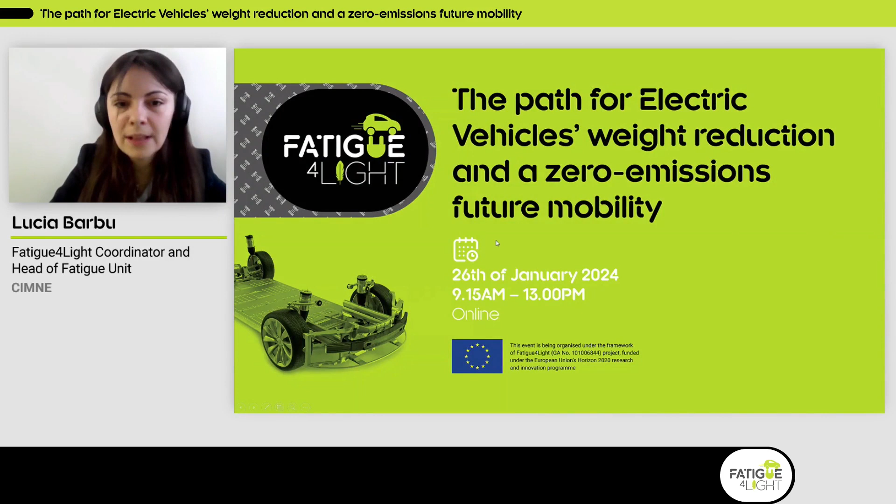Now we will be starting the event this morning with a welcome presentation and some general information about how the event will proceed today. After that, we will have a keynote session, and I will be giving you an overview of the general results we've obtained in the Fatigue4Light project.

After that, a very short coffee break, and we will continue with the technical session, in which several partners from our consortium will disseminate some very interesting developments we have achieved during these past 3 years of work. This session will continue until another small break, and we will end the event today with a round table, where we have industry experts in our consortium who will be openly discussing future perspectives for lightweight and advanced high-strength steel materials and components applied to the automotive sector.

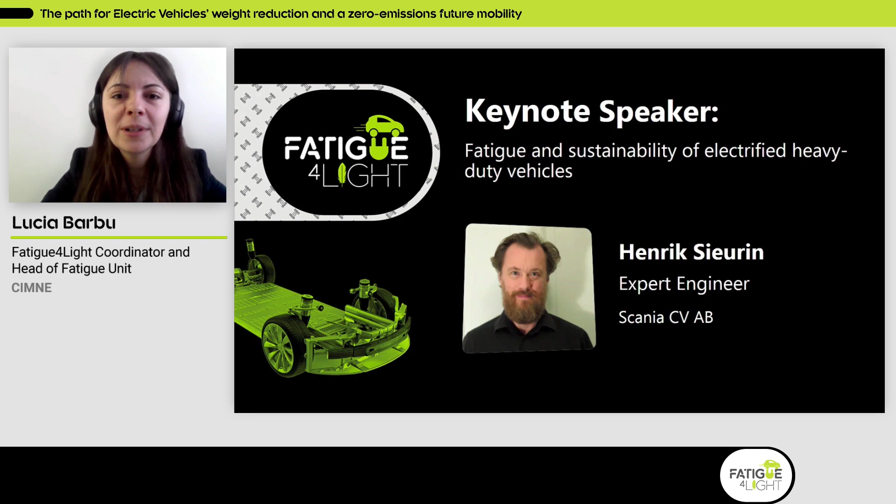Danny? Good morning, everyone. Lucia, thanks for the introduction and for the first words about the project. I just would like to say that during these 3 years in the Fatigue4Light, we have been developing lightweight solutions adapted to the specific needs of the chassis parts. These solutions are based on the development and introduction of advanced materials with high fatigue performance, and the development also of experimental and modeling tools to facilitate and promote the implementation of these solutions in electrical vehicles. Lucia will give you an overview of all these results at 10.

In the last years, there were a lot of projects dealing with lightweight in vehicles, which is what we need to reduce CO2 emissions. But I would like to remember that this Fatigue4Light project is one of the first European consortiums that holistically address the reduction of weight in the chassis parts, especially thinking in the needs that electrical vehicles will have. We understand that this is the way to reduce CO2 emissions, and also to extend the range of electrical vehicles and boost their introduction in the European roads.

If we think about the CO2 emissions effects, in the coming years, the vehicles that will have a higher increase in CO2 emissions are the heavy-duty vehicles. And also heavy-duty vehicles needs to consider fatigue resistance when designing most of the chassis parts.

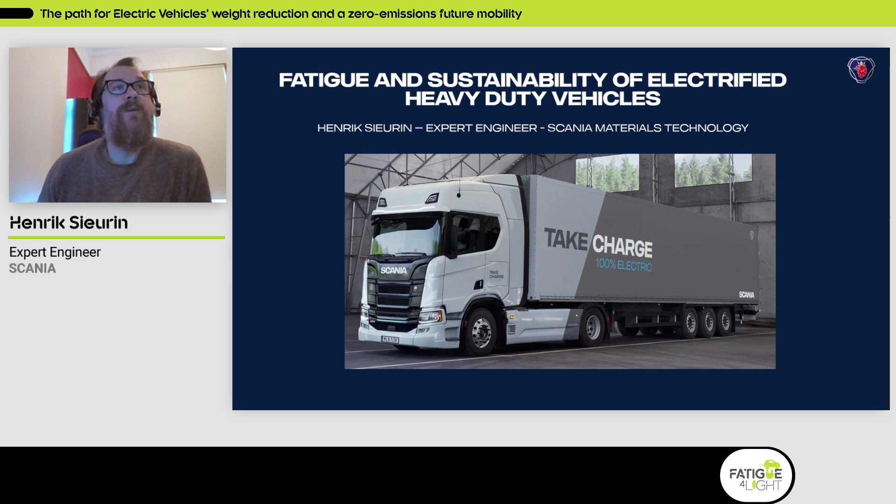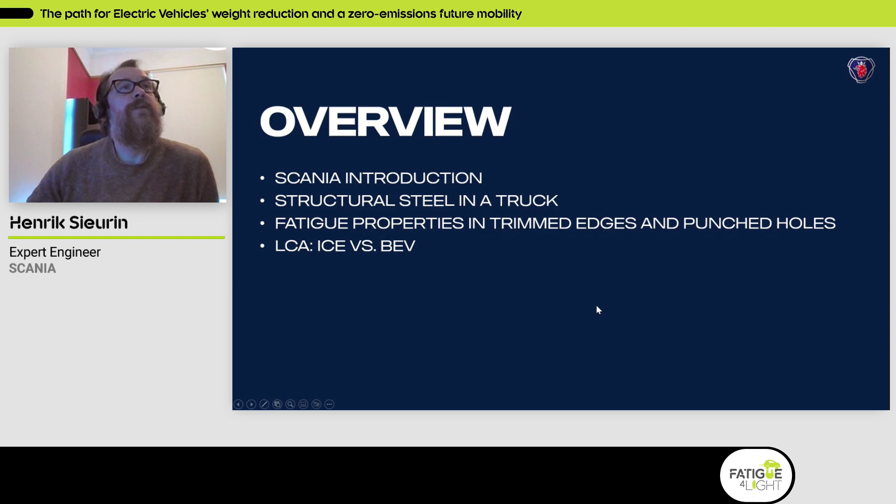So this is an overview of my 30 minutes. I will say just a few words about Scania and then what kind of materials that are used in the truck. And then I will focus on, obviously, on fatigue properties, especially for trimmed edges and punched holes that we have been focusing a lot on recent years. And in the end, I will also say a few words about a life cycle assessment study that we have been doing, comparing a combustion engine and a battery electric truck.

So Scania, we produce trucks, everything from long haulage, construction, and distribution. We also, due to our modular system, are well prepared for building more special purpose vehicles like fire trucks, for an example. We also produce buses and engines for marine applications or gensets, and of course, network and services related to our hardware and also used vehicles.

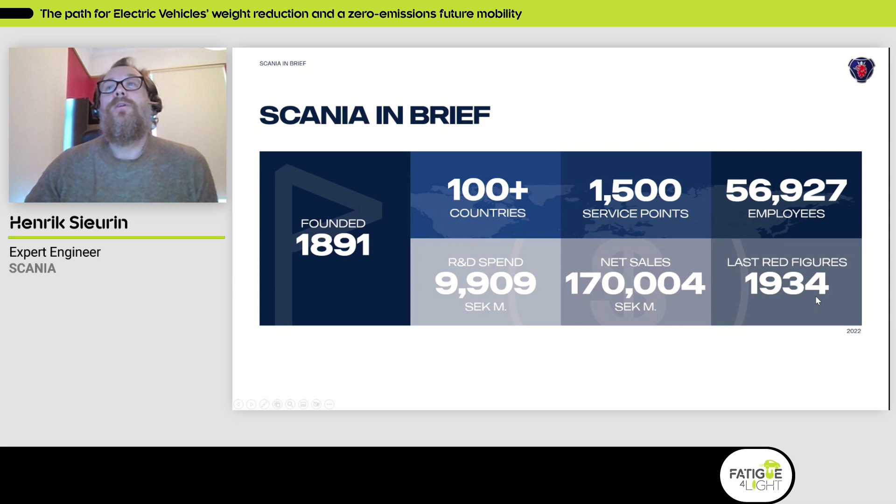So Scania is a relatively old company, founded in 1891. We are about 57,000 employees in over 100 countries. Last year, we spent about 1 billion euro on R&D. And we are also very proud that we have been doing profit since 1934, which is some kind of record, I think.

Scania belongs to the Volkswagen network, and you see the 13 different brands within the Volkswagen group. And this is, of course, very nice to have this internal network when you work with R&D to share experience and knowledge.

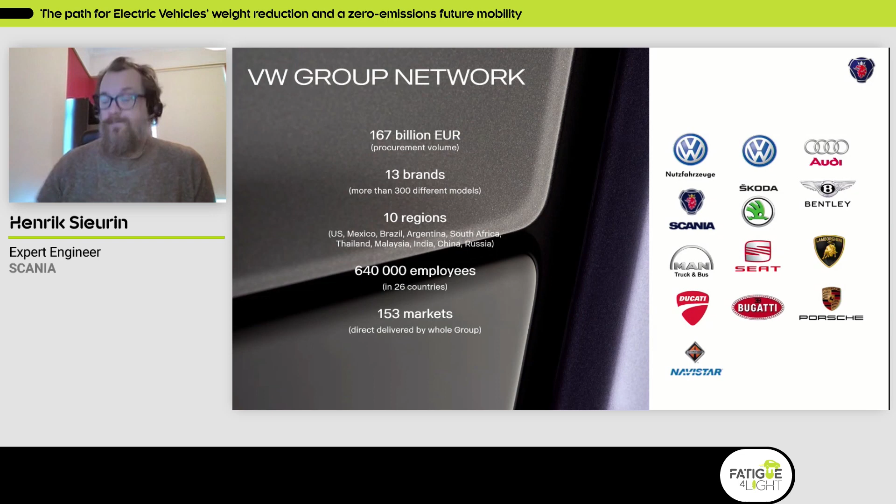But in the heavy duty vehicles section of the Volkswagen group, a company called Traton is created, where you find the heavy duty vehicles. So we have Scania and MAN, we have Navistar in US, and we have Volkswagen Omnibus in South America. And we are working very heavily on finding synergies to have a common platform both for chassis and cab, just as you see for passenger cars in the Volkswagen group, for an example. To start with, we are now focusing on finding common platforms for Scania and MAN, which might be the most similar vehicles, and then we will continue to also work more focused on common cab and chassis for the other two brands.

So the modular system is really one of the key factors for our success. We have a limited amount of part numbers with a few fixed interfaces, and by this you can combine and tailor suit the truck for every customer. Generally speaking, every customer's truck are tailor suited for their business, so to say.

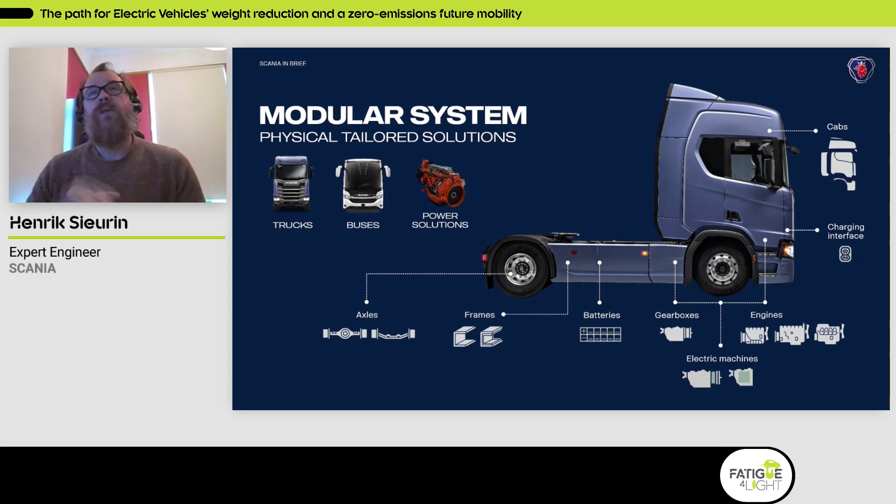Scania was the first heavy-duty vehicle manufacturer that in 2020 committed to science-based targets, and this is something we are really committed to fulfill. In 2025, already next year, we will reduce our CO2 footprint from our own production and operations by 50%, and I believe that is already fulfilled. Then we have the more challenging part, scope 3, the CO2 footprint from our products in service, which is 90% of our total CO2 footprint.

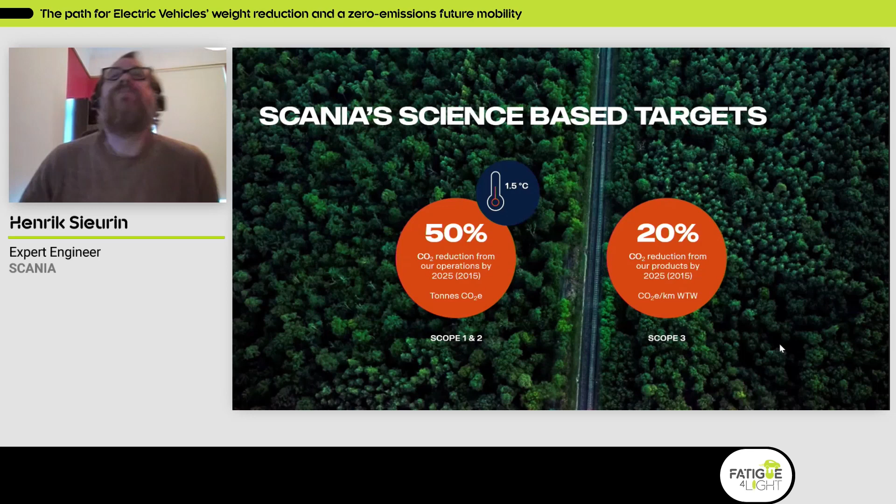So enough of Scania background. I will now focus more on steel and fatigue, my favorite subjects, especially structural steel or steel sheet metal.

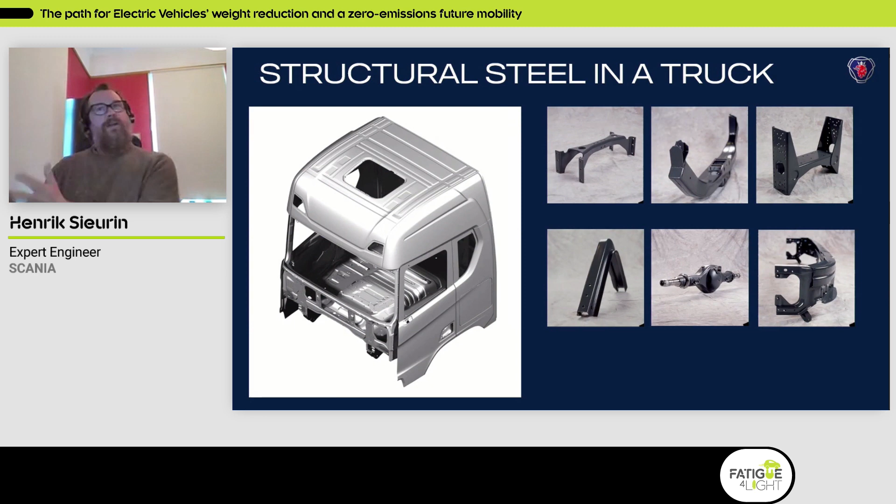First we have the cab, which from a material point of view is similar to a passenger car, with similar requirements and similar material grades. Then we have the thicker sheet materials for the chassis components.

For the chassis, we typically have between 3 and 10 millimeter thick steel, thermomechanically rolled in general, but also press hardened steel for crash resistance, like front underrun protection and bumpers. You might also see more press hardened steels for battery electric vehicles. This is a traditional combustion engine chassis, and the requirements are, well, I would say fatigue is the most important property that a chassis is dimensioned for, but of course you also have stiffness and corrosion issues.

The cab, on the other hand, is another world. Here we have cold rolled steel and similar grades as found in passenger cars: DP steels, CP steels, microalloyed steels, and also press hardening steels, galvanized of course. Here the requirements are more about crash, stiffness as well, surface finish, and of course you also have fatigue requirements for the cab.

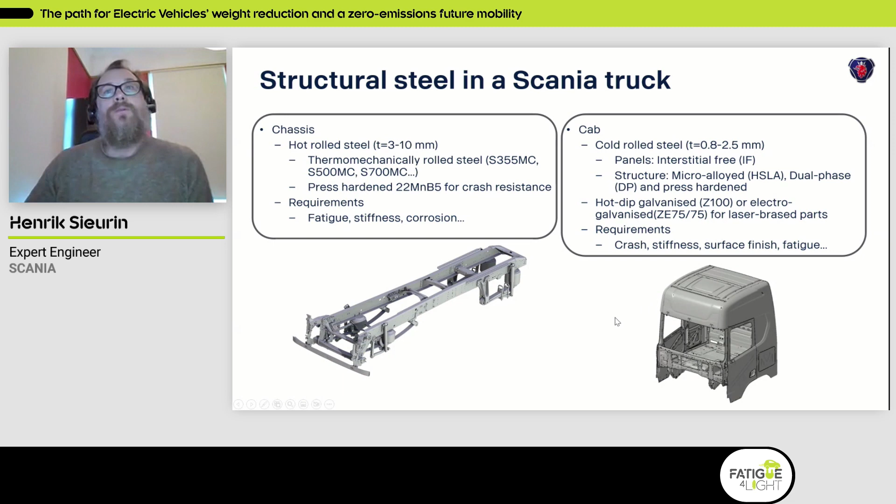So when we now electrify our trucks, we face new challenges due mainly to the size and weight of the batteries. We have to load many tons of batteries in order to get a good range, and the batteries are big, so we have a limited amount of space. We need high strength, very formable steels in order to optimize the design. And as mentioned, these batteries are also heavy, so in order to still have some load carrying capacity, we need to reduce the weight.

Lightweighting is very important, I would say even more important now. The batteries are also expensive, so we have to find cost sustainable materials too. Steel is still relatively cheap compared to other lightweight materials. And the batteries are sensitive, so we need good crash protection, which also asks for advanced high strength steels to do this job.

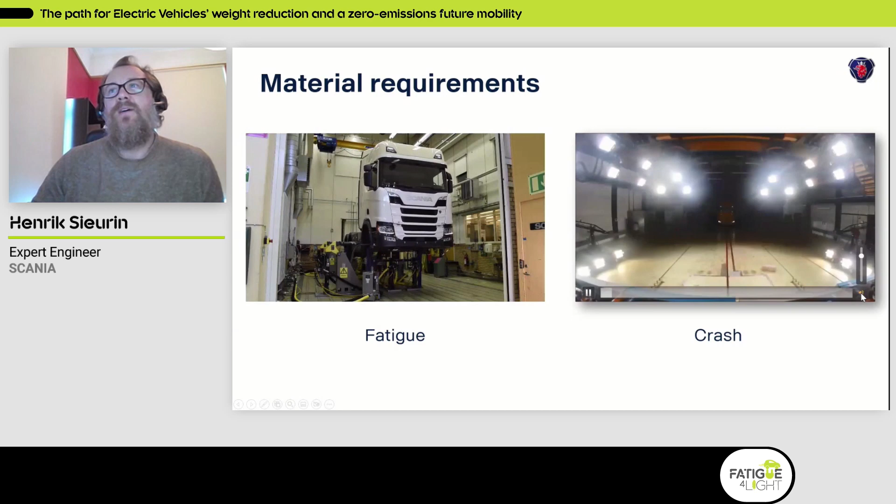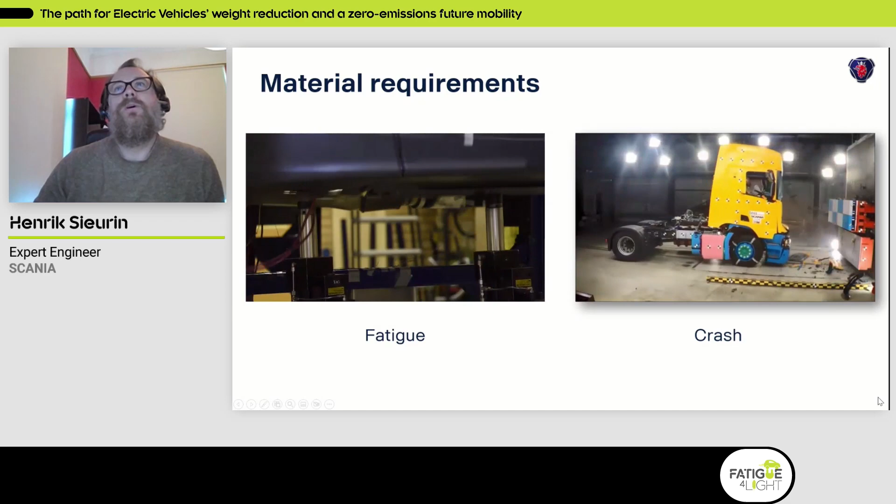So the outlook is that there will be an increased demand for fatigue and high strength steels with state-of-the-art forming technologies for the electrification journey. Again, the requirements are fatigue and crash. I will focus on fatigue in the coming slides, but crash is also important, obviously, not only to protect the truck driver, but also to protect the driver in a passenger car in case of a crash.

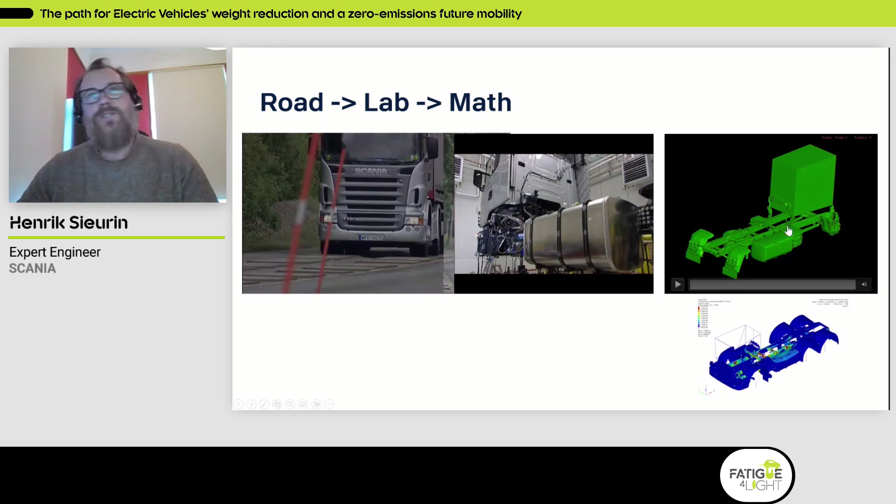The way we design for fatigue is, first, we drive a truck on our test track with different obstacles, simulating real road conditions. Then we take these signals and move them into a shake rig where we can accelerate the fatigue testing in a more controlled atmosphere. Of course, we also have a digital model for design and calculation engineers to find the hotspots and determine where we need to reinforce the structure or redesign in order to have good enough strength.

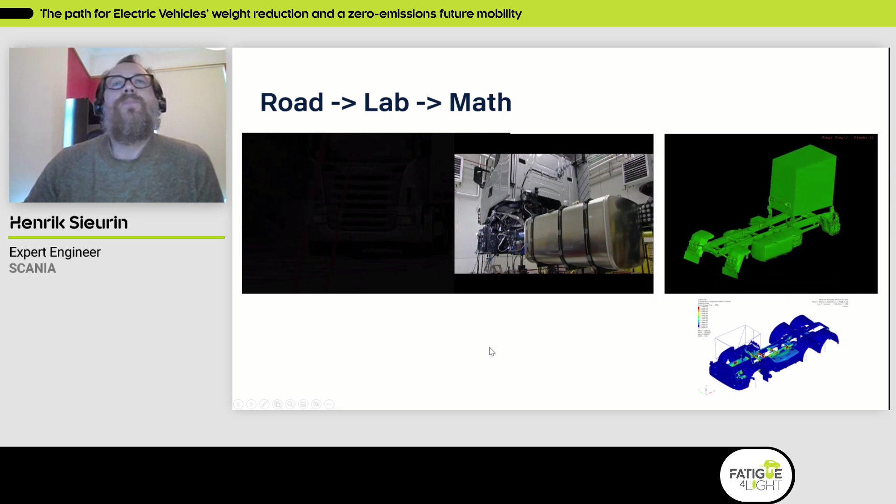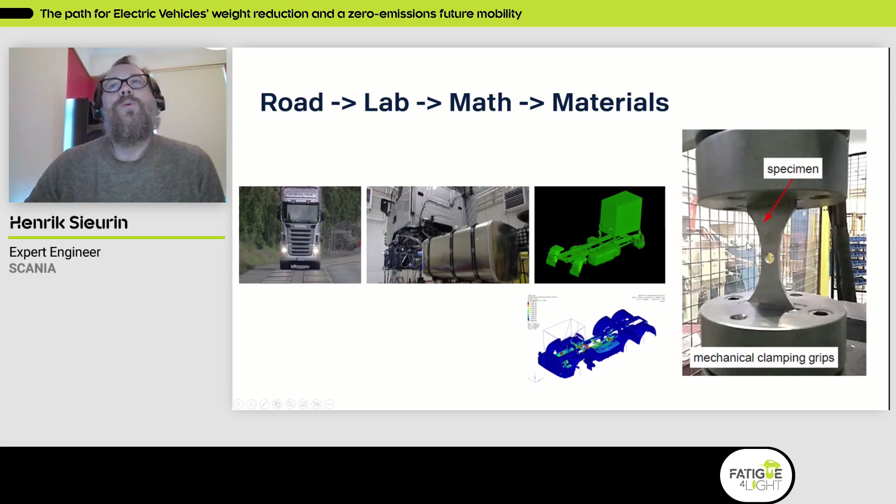When I put together these slides yesterday, a previous slide I've shown many times before, I realized something was missing: the material part. When the design engineer or calculation engineer comes to us in the materials department, they ask for material data, quite often rather specific material data. It's not enough to do fatigue testing on a polished sample; they need to know what fatigue properties we have in a bend with residual stresses, or in a punched edge, or a trimmed edge. So this is obviously also one piece of the puzzle, I would say.

I will move on to focus more on fatigue. As you're aware, we don't have a linear relationship between yield strength and fatigue strength. It depends on the surface roughness. If you have a relatively smooth machined specimen, for example, there's almost a linear relationship - increased yield strength gives increased fatigue strength.

But then it makes no sense increasing material strength anymore. So this is how we have thought in the past, maybe. But of course, if you still want to increase the fatigue strength, what do you do then?

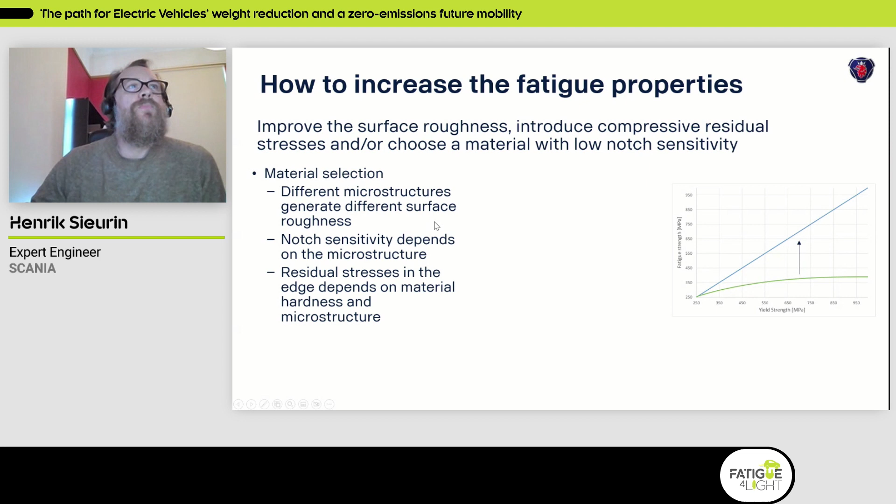Working with the material - different microstructures generate different surface roughness if you machine it or punch it, for example. A ferritic-pearlitic material generally gives a rather rough surface with bad surface roughness. On the other hand, if you have a pure martensitic steel, you get more like a cleavage fracture with a better surface roughness. And the notch sensitivity also depends on the microstructure.

I have learned that crack propagation is independent of the material strength, more or less, but that's not totally true for these more advanced high-strength steels with complex microstructures. The microstructure does matter, and I will talk more about that later. Of course, you can also introduce residual stresses, which depends on the strength of the material but could also depend on the microstructure.

Another way to do this is to work with the manufacturing methods. Laser cutting, for example, gives a much cleaner surface with better roughness, and you might even introduce compressive residual stresses at the same time. So this is another way to avoid fatigue issues.

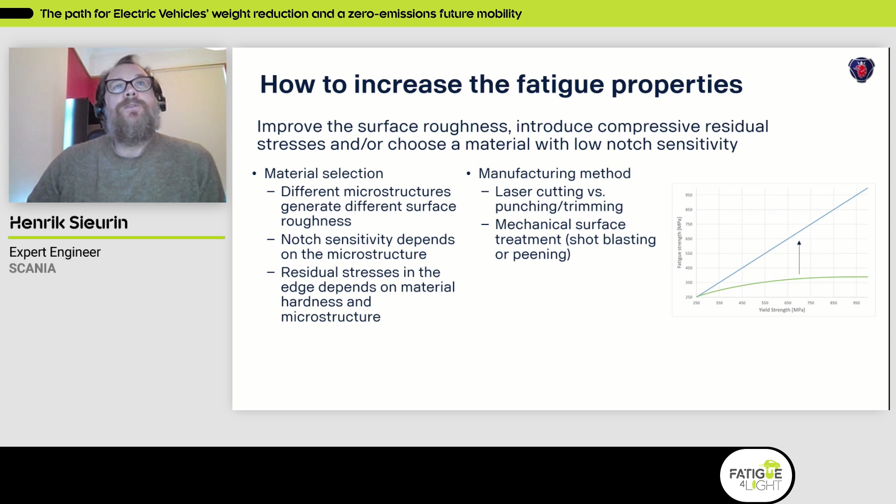And you can also introduce mechanical surface treatment like shot blasting or peening. This has a combined effect - first, you introduce compressive residual stresses, but you can also improve the surface roughness and the round corners and so on. So I have a few examples.

Example one, two-step punching. In the side member, you have a huge amount of holes, and from these holes fatigue cracks can initiate, especially if you have an empty hole close to a bracket, like you see in the picture. So when you punch a hole, you get...

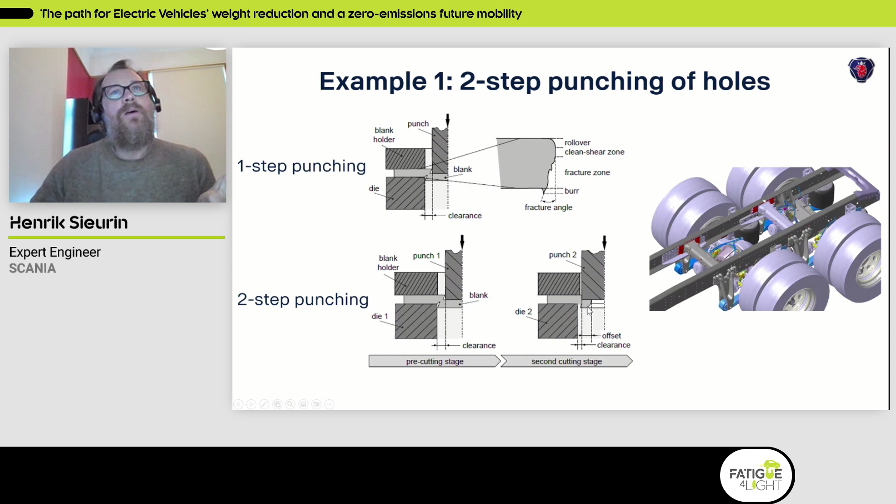a shearing zone, a fracture zone with relatively bad surface roughness, and here fatigue cracks can initiate. But if you do the two-step punching, you first punch a smaller hole with a smaller diameter, and then you come after with a slightly wider punch to shave off a piece around the edge.

By doing this, you get a much nicer surface. To the left, you see a typical one-stage punched hole with the shearing zone and fracture zone - you see quite high hardness in combination with poor roughness, which is not good for fatigue. In the two-stage cutting or punching, on the other hand, you can compare this blank zone, this shearing zone - it's much longer, you have no residual stresses, and you just have a small fracture zone.

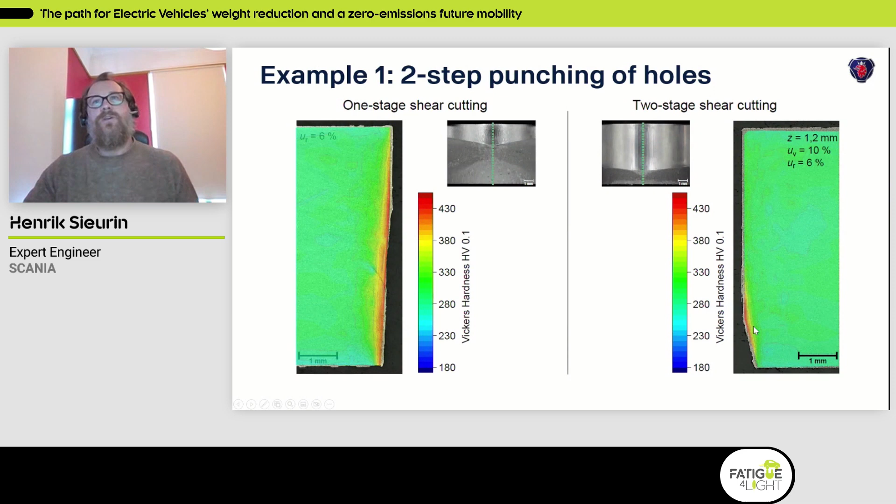So this is a good way to increase the fatigue strength in punched holes.

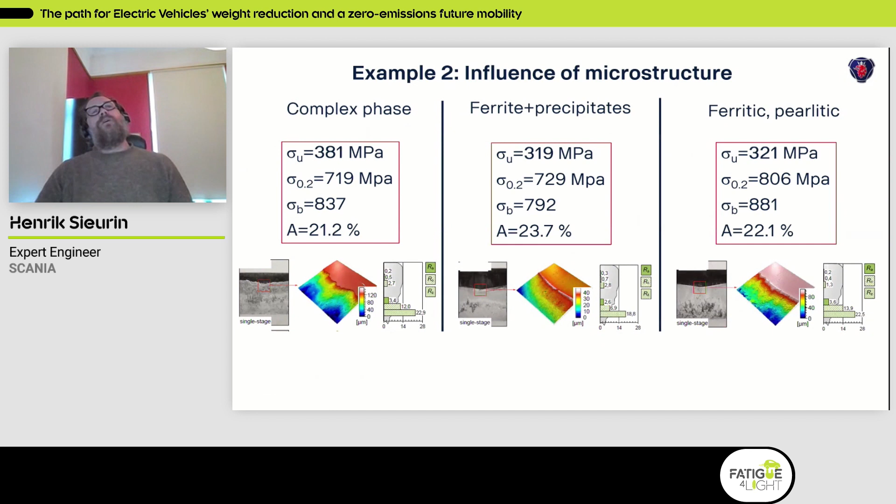I move on to an example of how the microstructure also can influence the fatigue properties in a punched hole. In this study, we compared 3 different materials: a complex phase steel, a ferritic material with precipitates, and a ferritic pearlitic material.

The yield strength was rather similar for these 3 grades, with the complex phase having the lowest yield strength. The ductility and elongation were also rather similar, with the complex phase actually having the lowest ductility. The surface roughness was also rather similar, with the complex phase having the poorest roughness in this fracture zone.

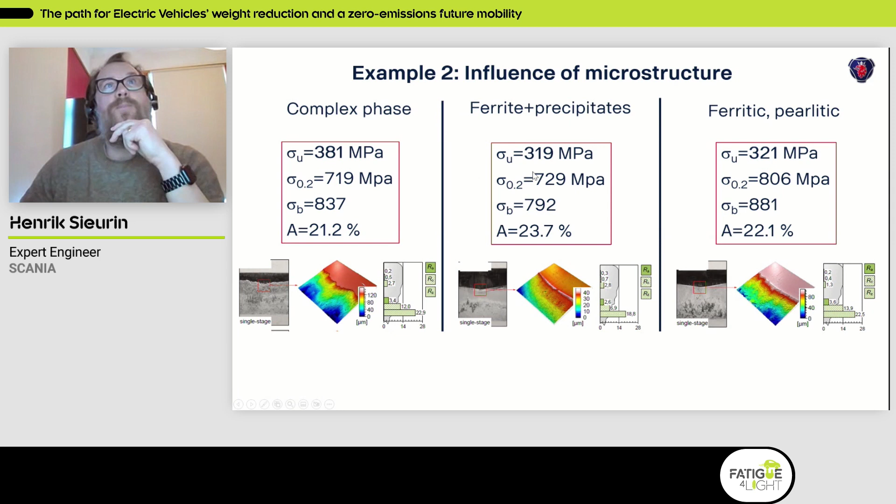Despite having the lowest yield strength, lowest ductility, and the poorest surface, it had the highest fatigue strength, 380 compared to 320. That's almost 20% better fatigue properties, despite these other factors that you would assume would give a lower fatigue strength.

So one reason for this, to try to understand why, we did fracture toughness testing performed at EURECAT with this essential work of fracture method. As you can see, this complex phase steel had almost doubled fracture toughness compared to the other materials.

So that indicates a better or lower crack propagation rate. Here we come into this notch sensitivity, because in a punched hole, you always have crack initiation - you already have micro cracks. So it's really about the crack propagation.

I know that a Catalan institute has been working quite a lot to try to relate this fracture toughness to the fatigue properties, which is very interesting for designing new hot-rolled advanced high-strength steels for good fatigue properties.

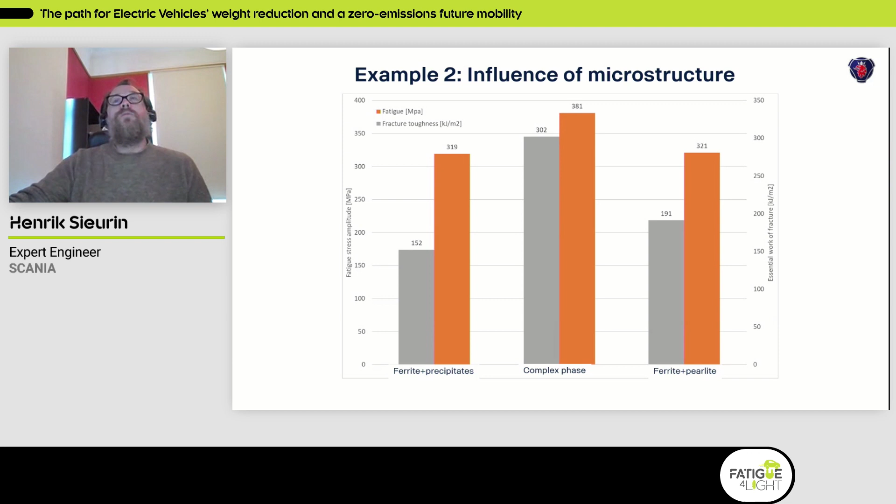This work also motivated us to start a PhD project at KTH, done by Nader Heshmati. He tried to dig deeper into this and understand how the microstructure influences the fatigue properties of advanced high-strength steels. In his work, he used the 500 MC, which is the most common steel used in chassis, and 3 more high-strength materials with similar yield strength but different microstructures.

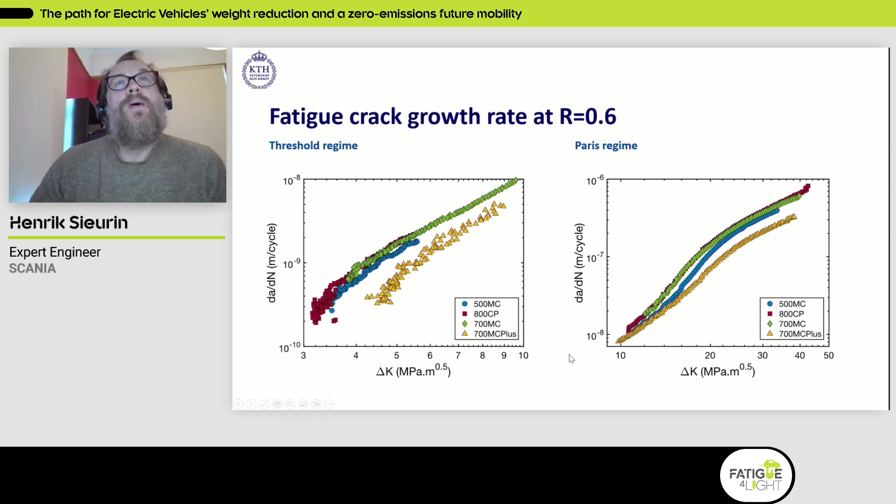In his work, he found that this 700 MC plus material actually showed a much lower crack propagation rate compared to the other materials, and it also showed better fatigue properties, even in a punched hole, compared to the other materials. He really dug deep into studying how the crack propagates in the microstructures and tried to describe these differences.

There are mainly 2 reasons that he found. First, if you look at the crack propagation in this material, we have a combination of transgranular and intergranular crack propagation. The crack propagates transgranularly through grains with a low Taylor factor, and then starts to grow intergranularly in grains with a higher Taylor factor.

In addition to this, this material also has martensite on the grain boundaries, so there the crack has to again propagate intergranularly around this martensite on the grain boundaries.

I had hoped that now they would give me a simple explanation of how the microstructure influences fatigue, but unfortunately he just made everything even more complicated for me. So now we also have the influence of the texture. But yeah, the more you learn, the more questions you get. That's fantastic. There will be more things to do, fortunately.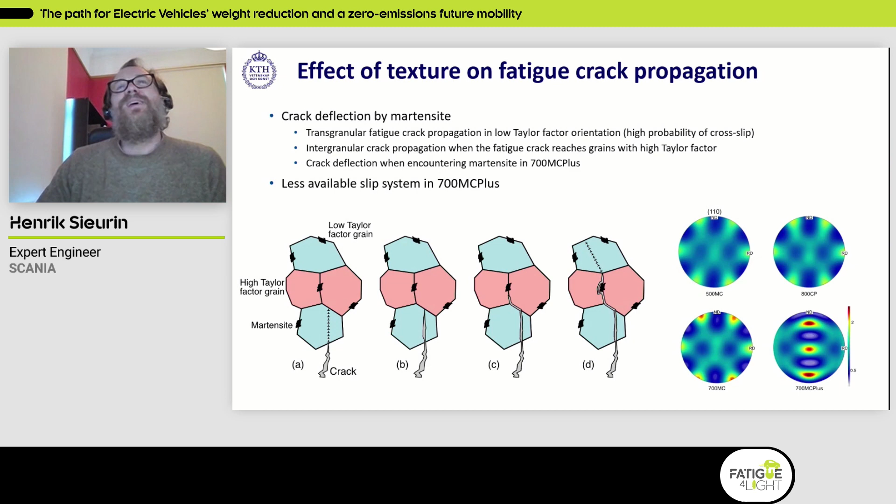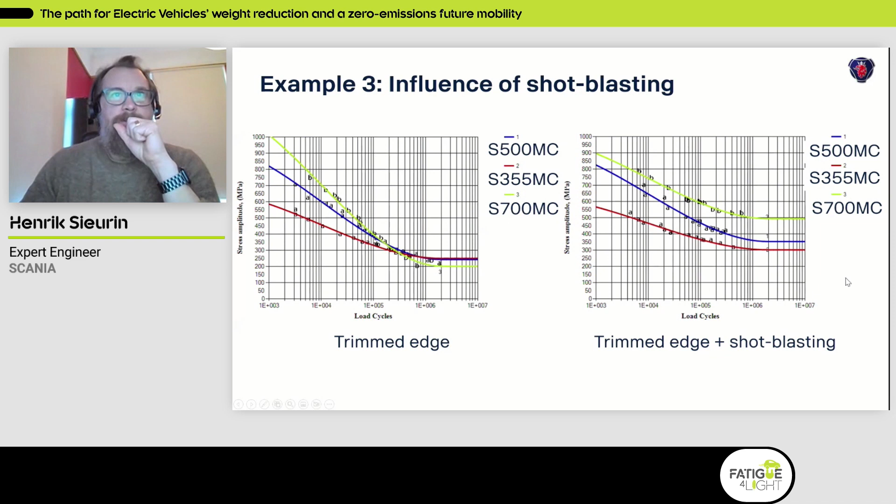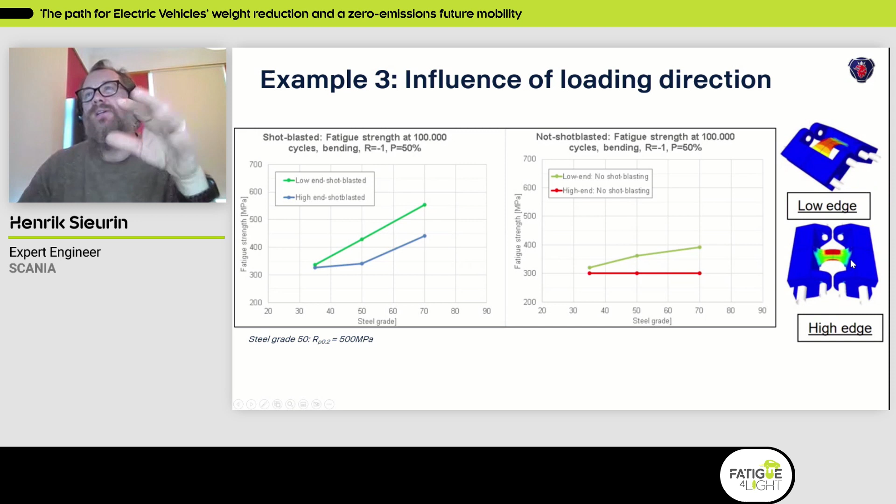If you have a not shot blasted material, for these high edge loading specimens, we see no influence - there's no point increasing the yield strength, it's the same. For the low edge, there is a slight increase. But if we introduce shot blasting, for the low edge bending we have an almost linear increase in fatigue with the yield strength, and even for the high end specimen, the influence of the shot blasting is really great.

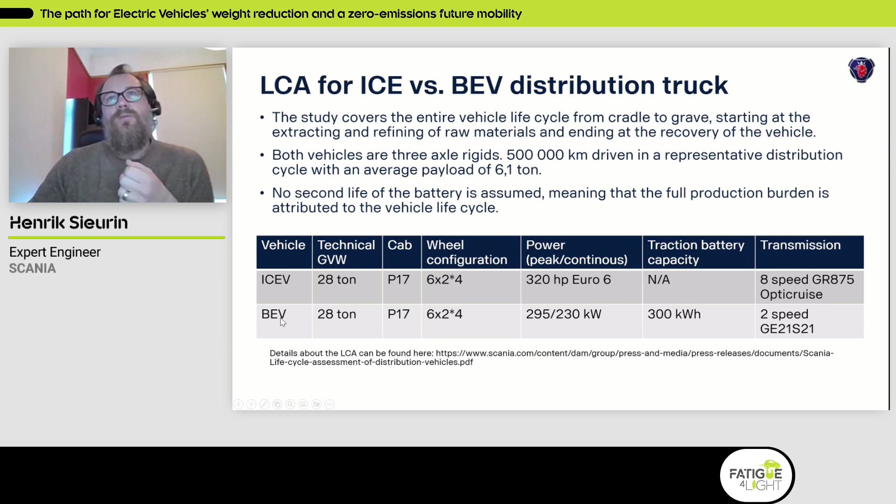Okay, I will continue with the last part of my speech, and that is LCA - an LCA analysis that we did a couple of years ago that I think is quite interesting. In this study, we compared a diesel truck with ICE to a battery electric truck. They had the same configuration, the same load, and we assumed 500,000 kilometer life length with an average payload of 6 tons. This BEV was our first generation BEV with a slightly lower amount of batteries compared to what we have today - today we have double the amount of batteries.

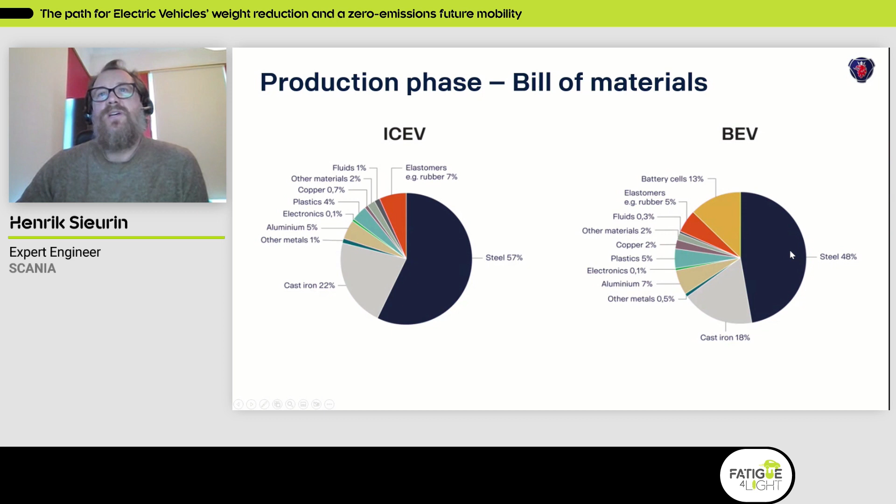But anyhow, first we'll look at the bill of materials. For a diesel truck, we have more than 50% steel, quite a lot of cast iron, and then some other materials. The difference for the battery electric truck is that we introduce batteries, which is quite a lot of weight. This is a limited amount of batteries, 300 kilowatt hours I think, so this will double more or less if we look at our latest truck. Steel is still around 50% of the weight of the battery electric truck.

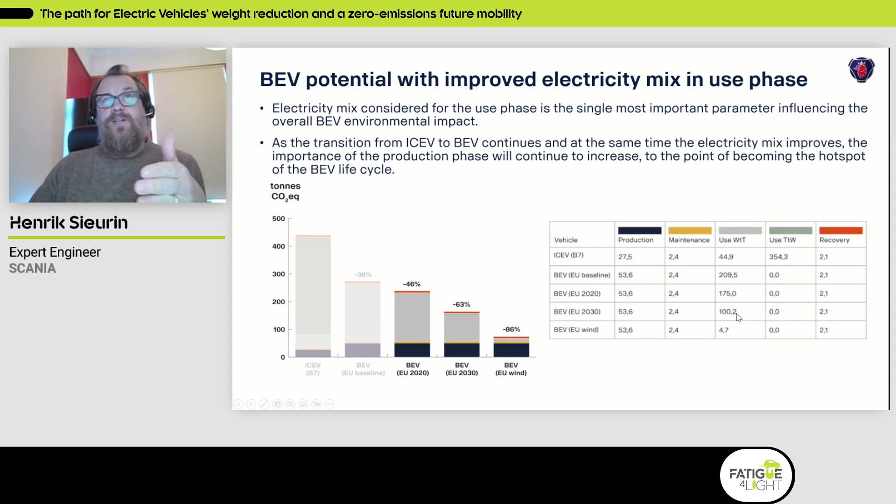But if we then assume that we have pure wind energy, for example, the use phase has now decreased radically, and now the biggest part is actually the production part, where we have the battery and steel production. So in order to increase even more, to come close to 100% reduction, we need to work with this part.

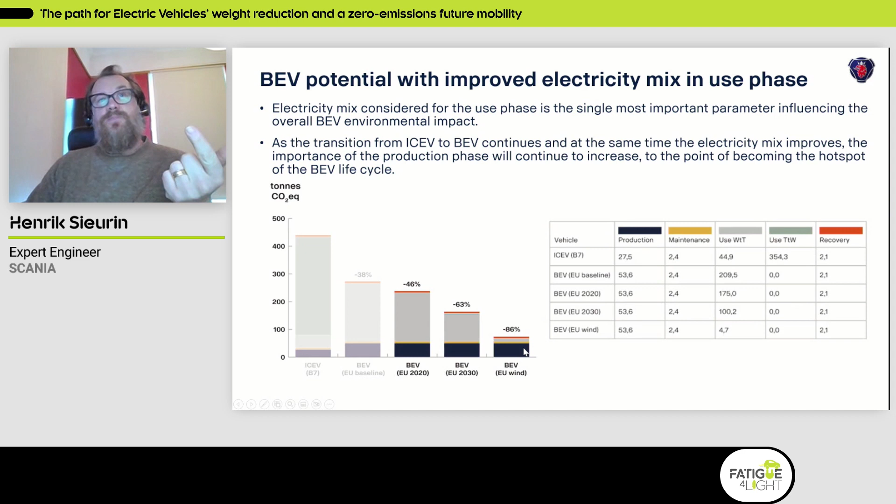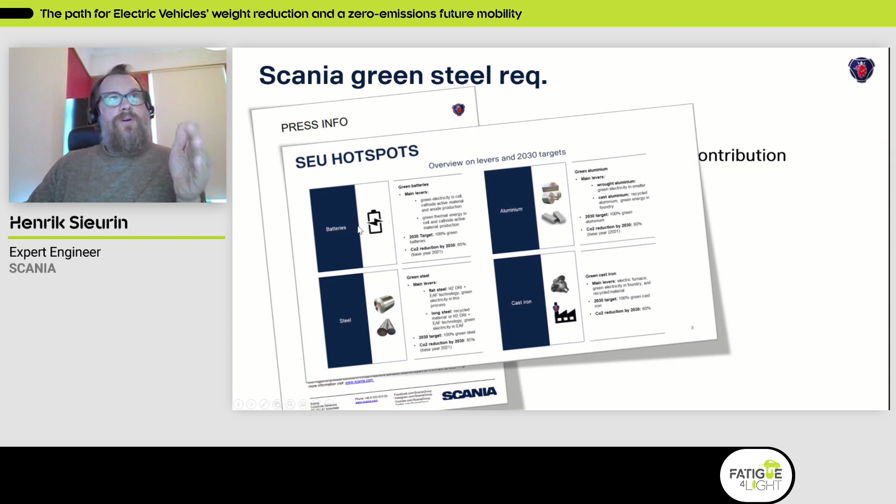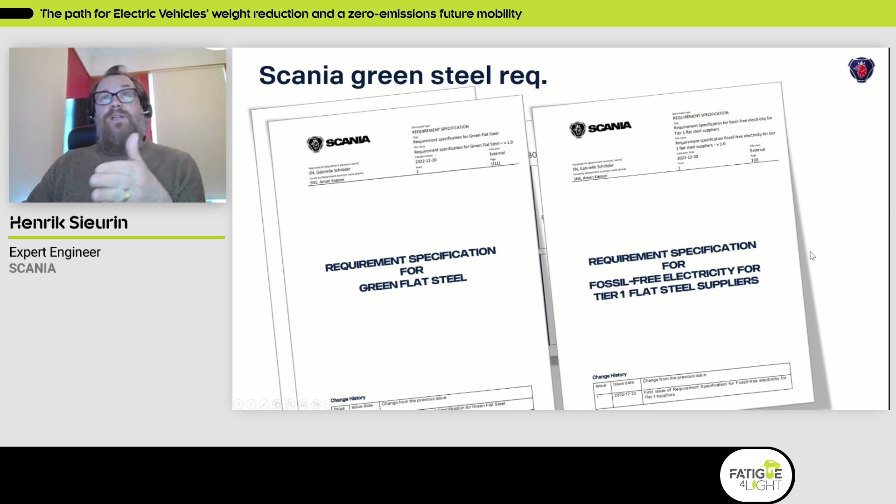We need green electricity for the battery production. Scania are now purchasing our batteries from Northvolt, which uses green electricity. And then we have fossil-free steel coming in a few years that will also help us decrease this part so that we get close to zero here. We have quite ambitious requirements for our supply chain when it comes to this. We have four areas that we focus on: battery, steel, aluminium, and cast iron. We have requirements for how we define green steel and green electricity, and from last year we now have requirements on our suppliers that they shall at least have a plan for how they will decarbonize their production.

So finally, concluding this LCA part: with sustainable battery production, fossil-free steel, and green electricity, there is potential for BEV trucks to decrease the CO2 footprint by well more than 90%. Also, the load carrying capacity and battery protection of BEV will put even higher demands on high strength steels with good fatigue and crash properties, and the demand for these materials will continue to grow. This is a very interesting area to work in - I think you all agree with me.

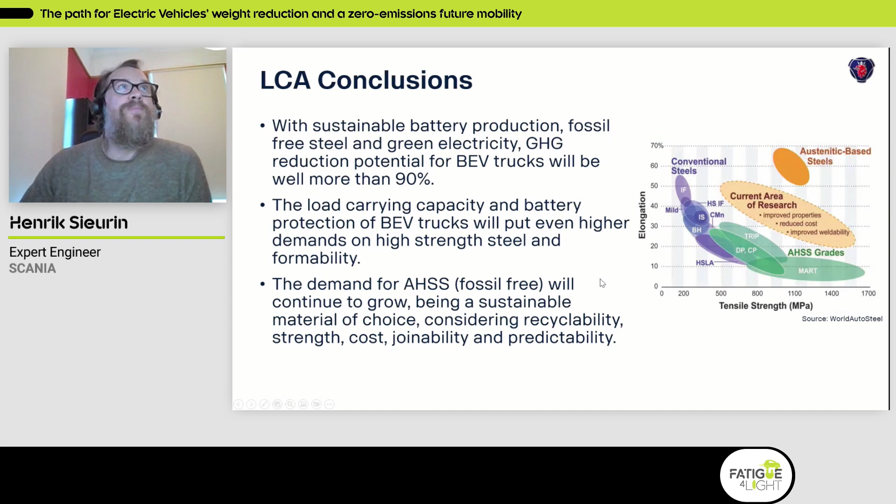Okay, so we've had a super interesting lecture from our keynote speaker, from Henrik. Thank you so much. And now it's my turn to share with you a bit of a general overview of our project.

If you are here, probably this is not the first time you're hearing about the Fatigue4Light project. But just in case, Fatigue4Light stands for fatigue modeling and fast testing methodologies to optimize part design, and also boosting lightweight material deployment in chassis parts. So we have main keywords for our project: good fatigue performance, lighter materials, and we are targeting chassis applications.

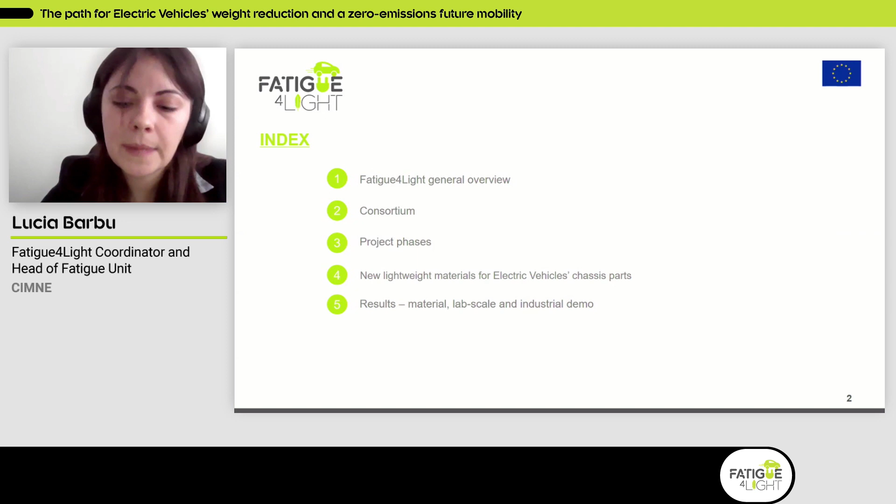My purpose today is to give you an overview of some data about our project, our consortium, and the project phases that we've been going through in these past 3 years. Let's speak about new materials that we've analyzed and studied in the Fatigue4Light consortium, and after that I'll give you an overview of the results we've obtained. I won't spend too much time, but there are some very interesting lectures following this session that will get into more detail on different perspectives we've been pursuing. So just a global vision, let's say.

Who are we? What is the Fatigue4Light project? Well, we are a Horizon 2020 project. We started working 3 years ago, funded by the European Commission under the Horizon 2020 program, and the budget for our consortium was 5 million euros.

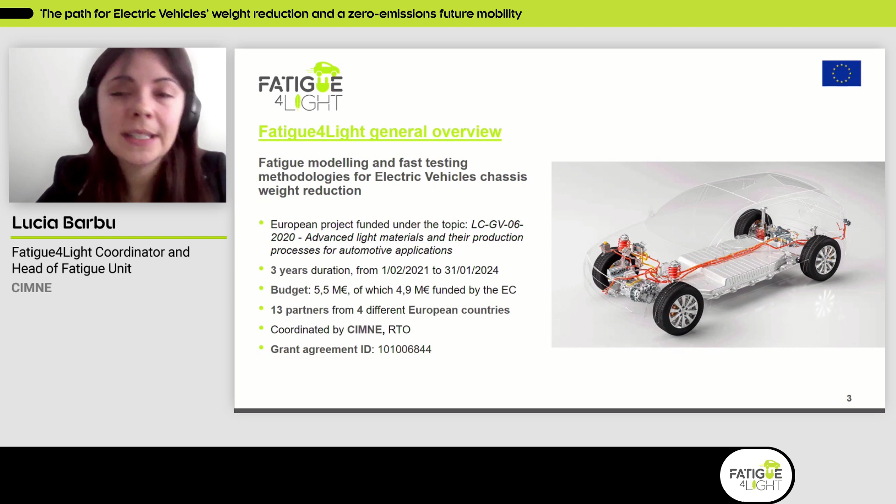And we are quite a varied consortium. We are 13 partners joining from 4 different European countries. The coordinator of the consortium is CIMNE, which stands for International Center for Numerical Methods in Engineering. This is the research center where I've been working for the past 14 years, and our expertise, our specialty, is of course numerical simulation.

In the consortium we have a very interesting mix of capabilities and perspectives, because we have 3 research institutions and 3 universities which have joined us, but the biggest weight in our consortium is taken by the industrial companies. We are very happy to have collaborated with all these industrial partners these past 3 years, and today you'll hear their perspective on the lightweighting process we've been pursuing, and also perspectives for the future, because we've been working hard these past 3 years, but we don't want to stop here.

The idea is to use as much of the developments we've reached in the project as possible for the future, to take them even further. We've developed some interesting stuff in the project, such as new experimental techniques. And when dealing with new experimental techniques, you need a standardization process to be able to make these techniques as accessible as possible to other users who might be interested in using them.

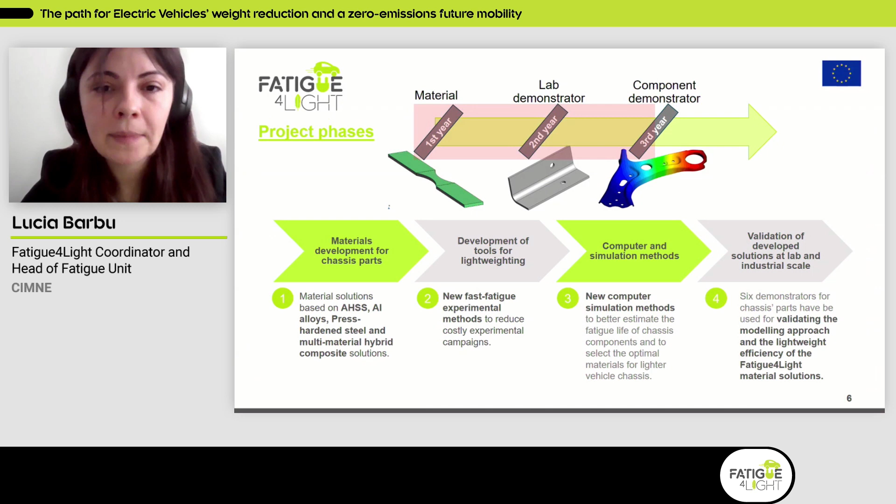All of this work culminated, I would say, in the third year, when we spent a lot of effort working at component level, validating all the different techniques we developed in the project at demonstrator level. Now, I said that we have been studying different materials in the Fatigue4Light project.

Here you can have an overview of what these materials were. On one hand, we focused on studying the behavior of advanced high-strength steel — complex phase 800 and complex phase 1000. CP800 for applications where this material was not the current state of the art, and CP1000 for materials where the state of the art was CP800, where the component was selected for a lightweighting process by changing its material.

After that, we had some material solutions that targeted hybrid materials and stainless steel. When I speak about hybrid materials, I'm referring to metal composite sandwiches, where we had outer layers made with aluminum and an inner core of glass fiber reinforced polymer. We also studied martensitic stainless steels adapted for press hardening.

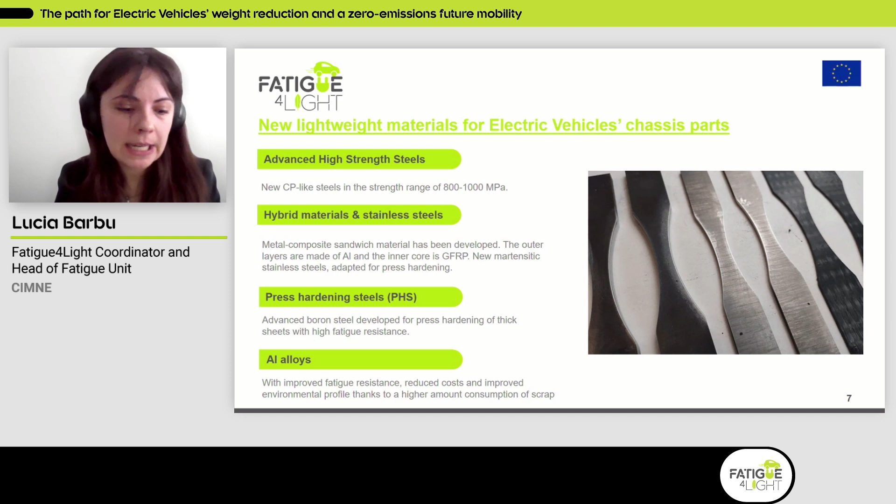Another material we studied specifically for heavy-duty applications was the 22 manganese boron 5, the advanced boron steel. And as I said, we also targeted aluminum alloys, which had improved fatigue resistance, reduced cost, and an improved environmental profile because they incorporated a high amount of scrap in their composition.

Now let's get to the results part, and here I have to go fast, so you will get this bird's view right from above. But if you have questions, the lectures that will come after will focus specifically on different aspects of these results, so feel free to ask us whatever you need.

So in the first year, the experimental campaign at coupon level — we wanted to check the performance of these different materials from the tensile point of view through tensile tests, studying their local formability with the hole expansion test. We were also interested in fracture toughness and some environmental effects studied by means of corrosion tests. Here I'm just giving you an overview of how the different materials compare for different types of tests, but later on you will get more details.

Now the most important test, I would say, for us, for the consortium, was of course the fatigue performance of these different materials. The fatigue experimental campaign we developed in the first year was focused on 3 different techniques — well, 4, but one is the conventional staircase method that everybody knows, I'm sure, that is widely used.

And it was our comparison point to see how the experimental techniques that we developed in the project compared to it. After that, we started to develop and look at the results for some fast experimental techniques, which were based on different concepts.

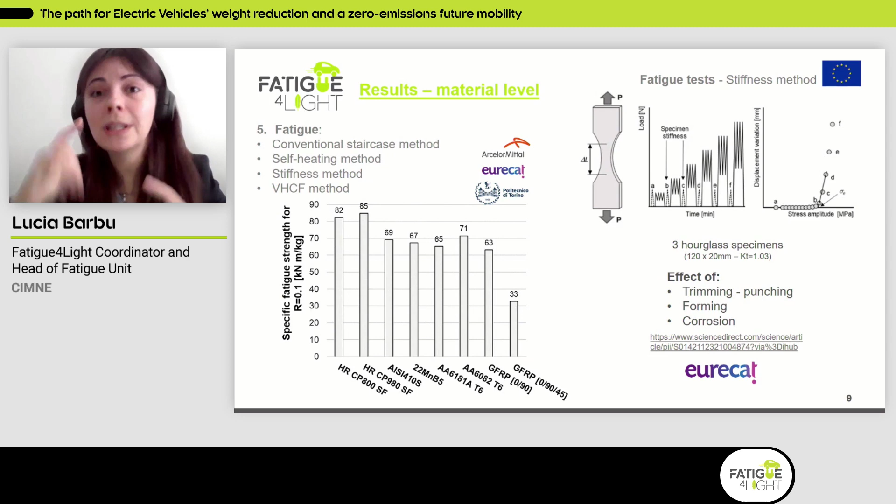Also, remember that we have published quite a lot. You can find information in the scientific publications that you can download in the conference hall.

Second year of the project. This was the year where we took the complexity a little bit further on. So we spent time at a lab scale demonstrator level. And what do I mean with this?

Well, we designed this L-shaped profile where we wanted to check how the different manufacturing techniques, such as trimming, punching and cutting, were affecting the fatigue life performance, the fatigue behavior.

And in this sense, we designed two different specimens. One was completely polished, and another one had some areas of the specimen which were left unpolished.

And our colleagues at EURECAT did an intensive experimental campaign where, under a reversion factor of -1, they tested these lab scale samples. And here you can see an image of the different failure modes that were observed experimentally.

And also an image from the numerical campaign that CIMNE performed on these specimens, because our ambition was, with the fatigue numerical formulation that we have developed, to capture correctly the fatigue life, the number of cycles until failure, but also to capture correctly the crack propagation.

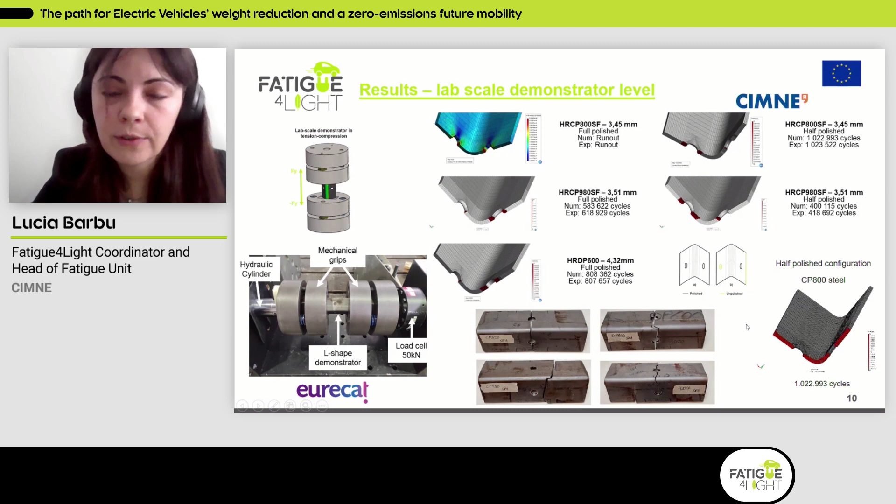So not only the initiation under the cyclic loading, but also how this crack progressed. You can see here also a small simulation of crack propagation. Again, more details about numerical simulation later on in the technical session.

Now, let's get to the uppermost level, the most complex level: the demonstrator level. In the project, we've studied several demonstrators with different material solutions. So here you have a view of some of them that were built.

These are not all, but for instance, you can see the lower control arm that we built in the project, in a steel solution with complex phase 980, complex phase 1000. Also, a version of this lower control arm which was built with a hybrid solution, aluminum alloy with glass fiber reinforced polymer core.

Then we did a very intensive campaign of studying both experimentally and numerically the wheel behavior, both on the disc and on the rim.

And we finished with a demonstrator that came from the heavy-duty vehicle ambit, let's say, the cross-beam member. And here you can see the view of the manufactured demonstrators.

Okay, now let's focus just a little bit, very fast, on each one of these demonstrators. The steel lower control arm.

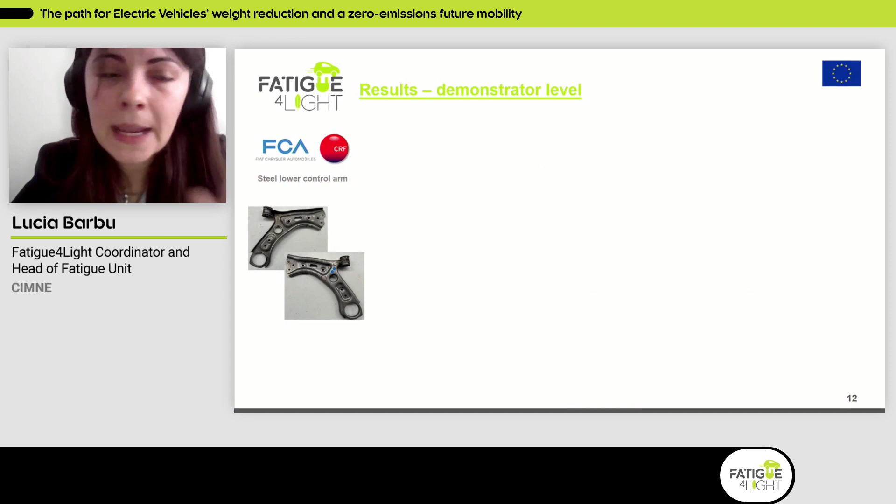This was a demonstrator proposed by Fiat, by CRF, our partner in the consortium. And here you can see a view of the demonstrator, which is screwed to the test bench.

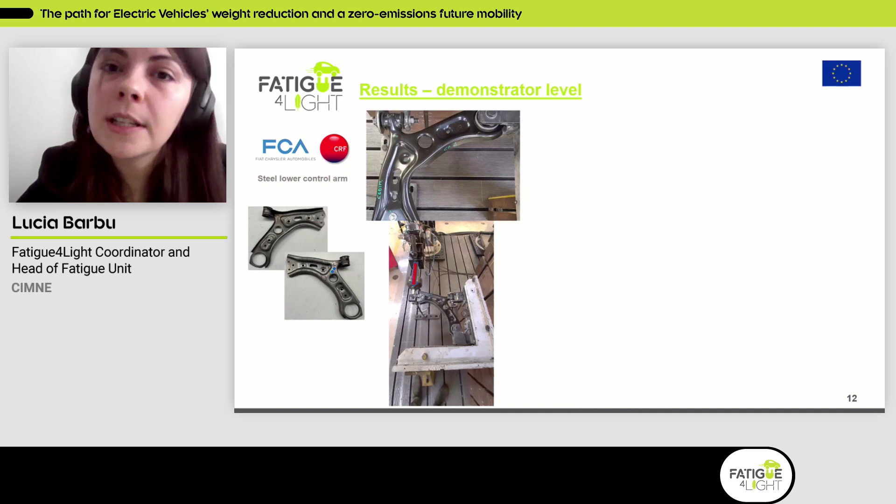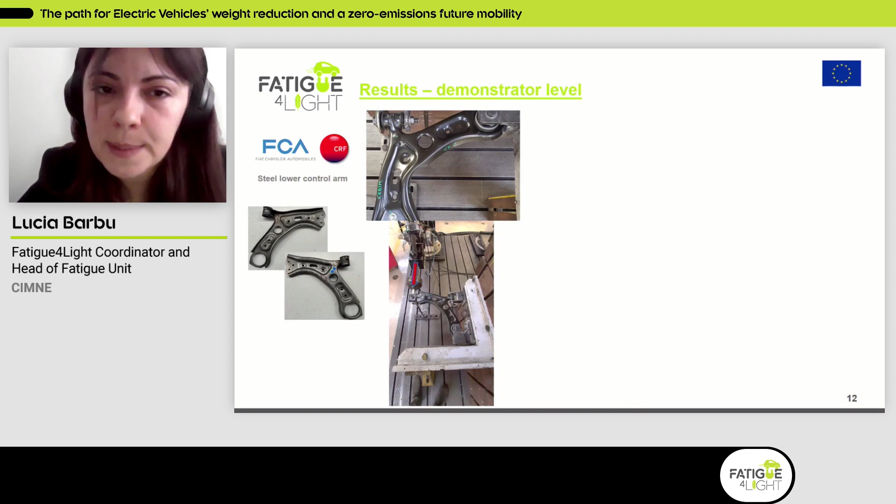And we did several experimental tests on this demonstrator to be able to understand the way it behaved. First, of course, a monotonic test, so a misuse test. And you can see here, for instance, the failed specimen under this misuse test.

Also, from the numerical simulation part, we also tried to give an answer to these different types of behaviors that were observed experimentally. And after that, we moved on, of course, to the fatigue test. There were several fatigue tests that were done on this component.

Here I'm showing you an image of one of the failures observed on the steel lower control arm, where a very interesting mode of failure was observed: a primary crack and then the development of a secondary crack that finally completely broke the specimen.

Later on you will see how, from the numerical point of view, we managed to capture this crack propagation. Okay, let's go to the next demonstrator.

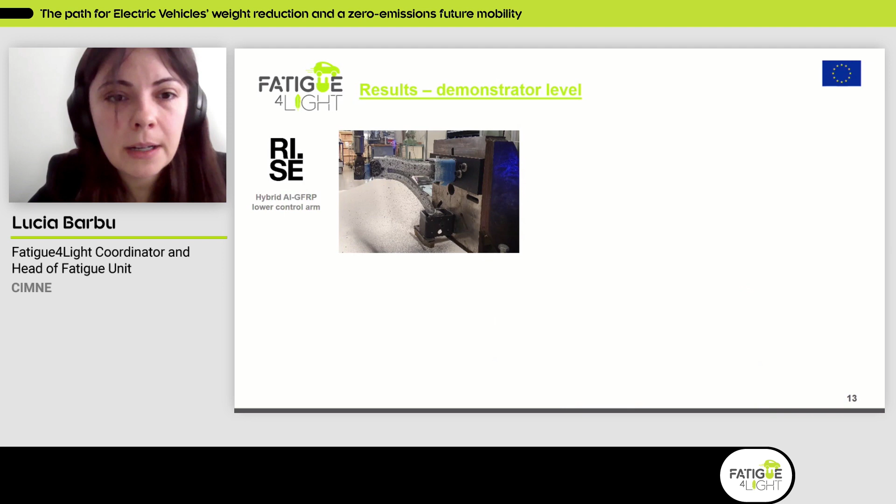Our colleagues at RISE Research Institute of Sweden developed, built, tested and analyzed this hybrid aluminum GFRP lower control arm. You can see here an image of the component screwed to the test bench, an image of the failed component, and a short animation of a digital image correlation test.

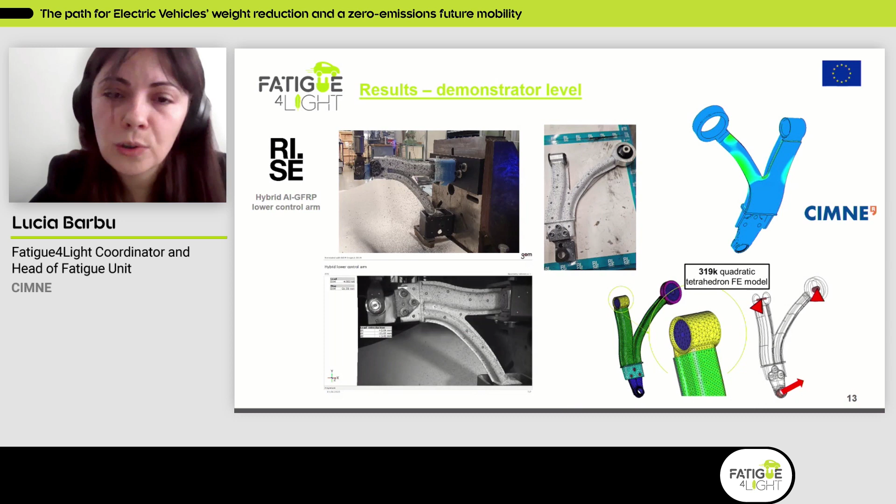From the numerical perspective, of course, we built models for this and analyzed it, and later on you will see the performance we got from the numerical point of view.

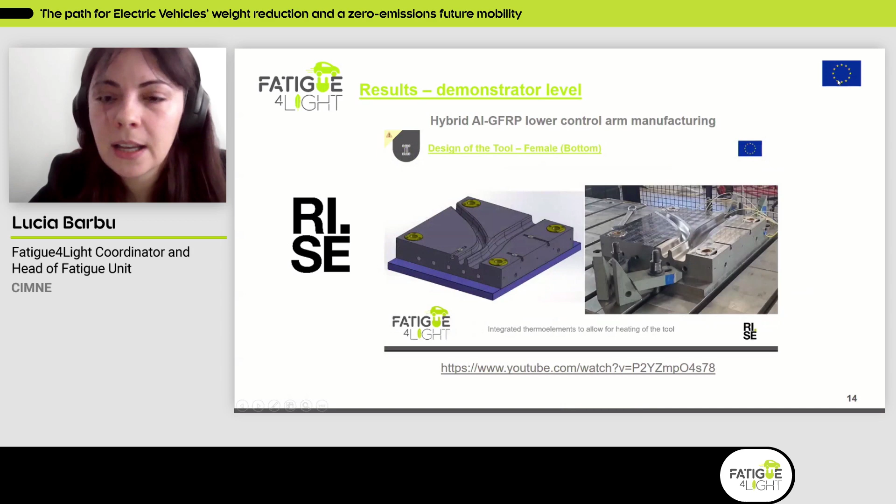Now I want to show a very nice video done by our colleagues at RISE, which details the manufacturing of this hybrid lower control arm. If you have any questions, please write in the chat, and our colleagues will be able to assist you with any doubts you might have.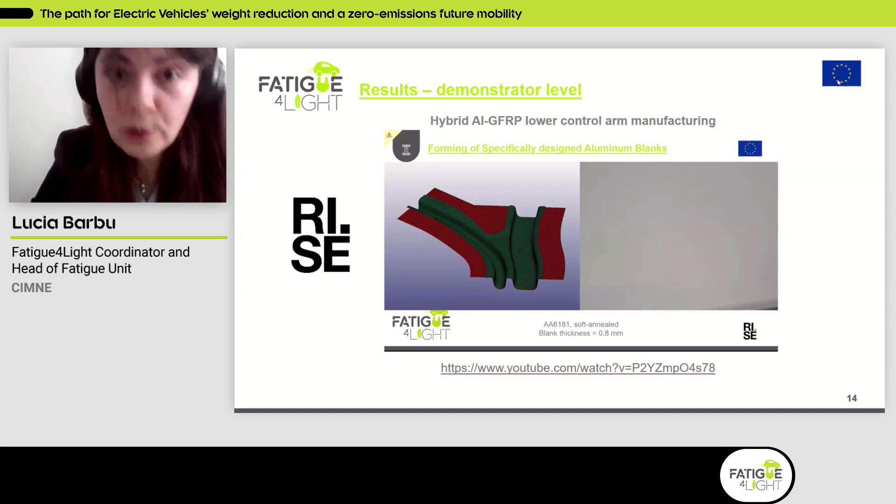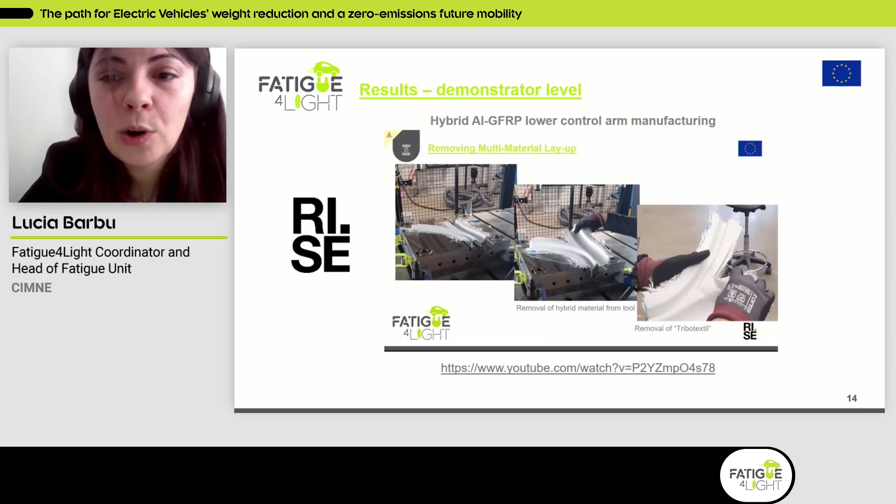Before manufacturing the specimen we had to do a numerical analysis beforehand to identify the hotspots in the geometry and the feasibility of manufacturing, etc. Here you can take a look at the whole process of stamping and joining the different parts, and the final built version.

Okay, let's go further.

Some other demonstrators: an intense experimental campaign, a lot of work done by our colleagues at Magnetto Wheels on a wheel prototype, on a disc proto. They studied different materials and designed a specific stamping cycle for the wheel, and they observed some quite interesting results.

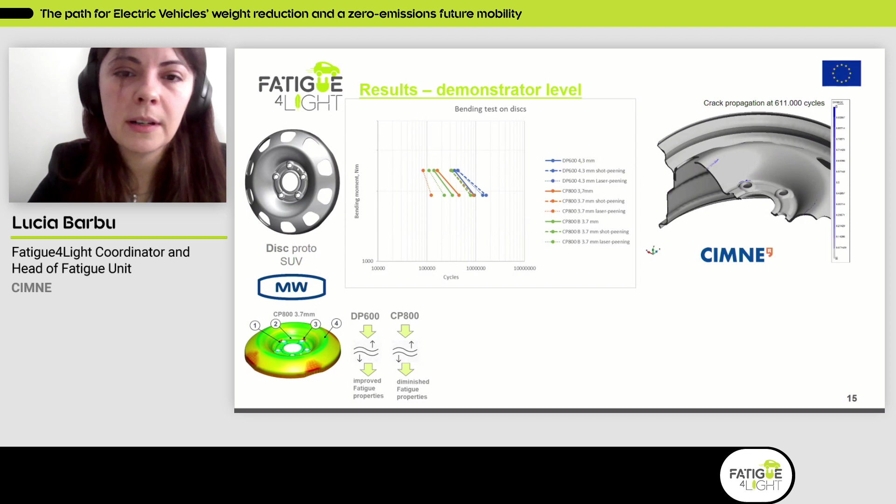For instance, some materials behave better after the stamping cycle with regards to fatigue, while others behave poorer. From the numerical perspective, we wanted to give a response to the behavior observed experimentally, and you will see later how this compares experimentally and numerically for this specific component.

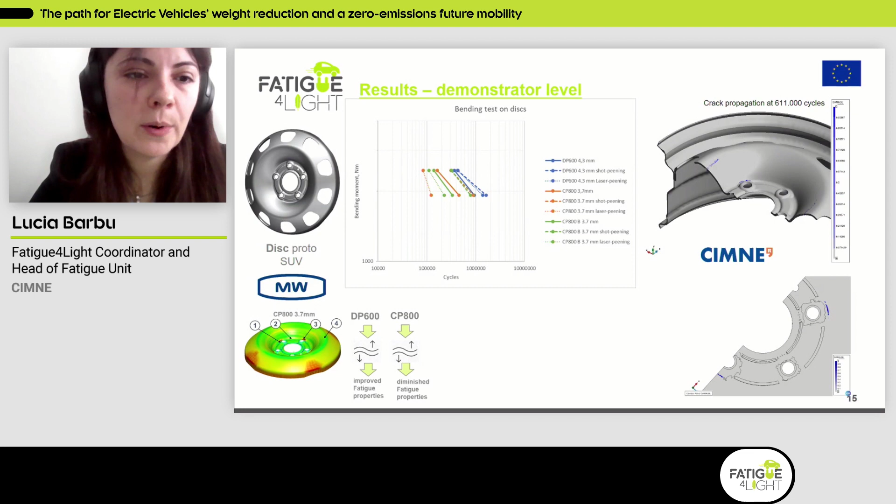The last component in the project I want to show today is the cross-member beam proposed by our colleagues at Gestamp. They proposed a symmetrical design, building only half of the cross-member beam, and here you can see a very nice animation showing how the actual manufacturing process is done.

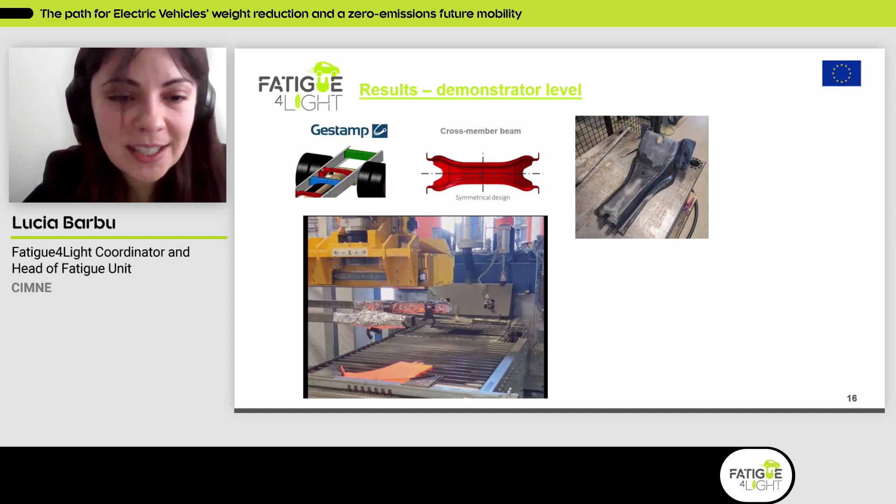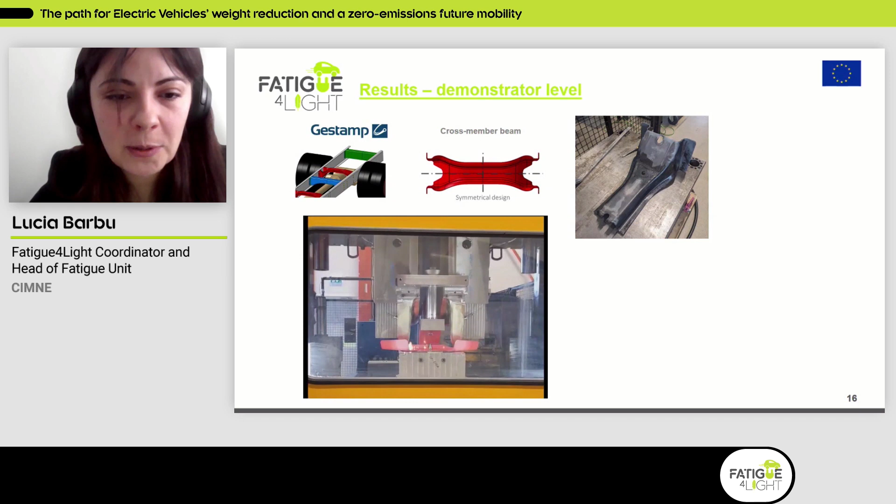It's quite short, so we won't be taking too long, but it's really a beautiful video. Then you get the end result, which is the cross-member beam, half of it, as you can see here.

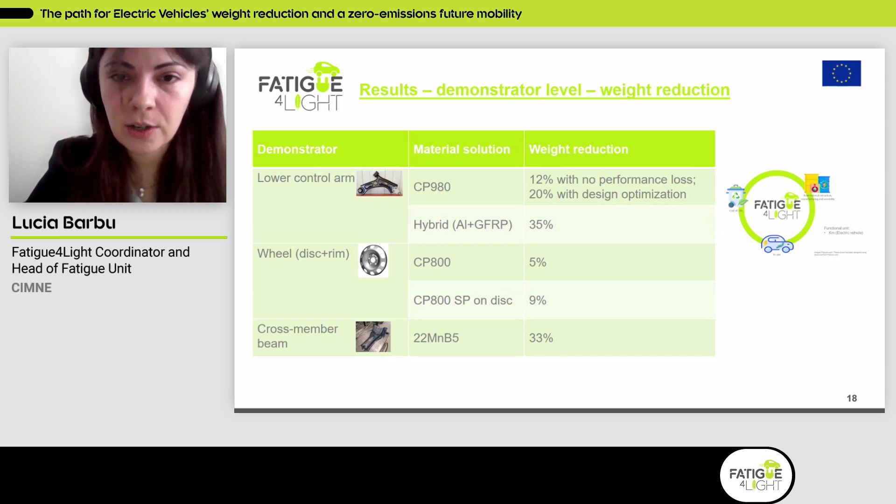Later on, in the talk of my colleagues, Violeta and Marga from Eurecat and from RISE, you will find out more about the eco-design methodology that we followed in the project, which takes into account several different aspects that might influence the weight reduction you see here. Okay, nothing more from my side. Thank you very much for your attention.

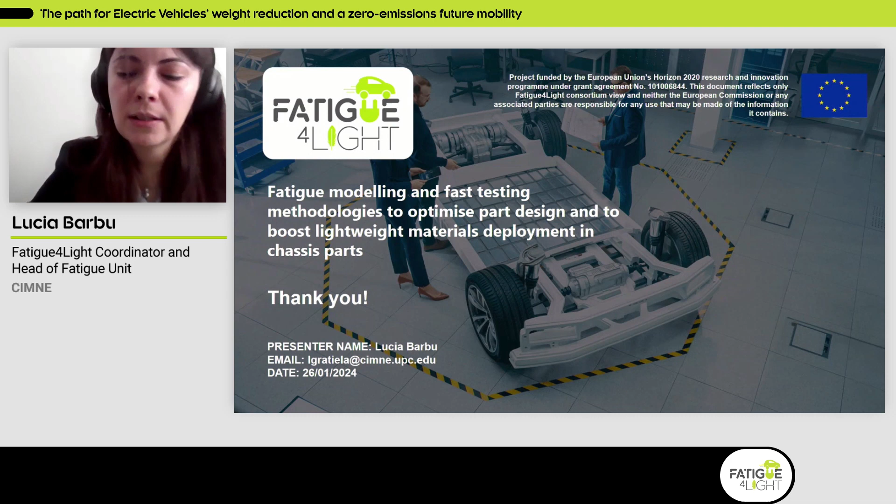Yes, thanks, Henrik, for this very interesting keynote, from the shaking track to the propagation of a crack into the microstructure. This is what makes material science very exciting, that we can solve big things with very, very small approaches. Also, Lucia, thanks for the overview of Fatigue4Light. We will hear more about results in the coming minutes. Now we only have time for a short question.

What I will do, Henrik, is put together some of the questions we get from the chat and try to make it only one. There are questions about the lightweight potential of steels. You mostly talk about high strength steels, and will that be enough to fully reach a completely lightweight solution for a vehicle? Or do you think we will also need the use of multi-material, like some patches for reinforcing crash in the battery section or in the chassis? And to make the cocktail shake a bit more, how will these new steels, call it green steels or steels with a large amount of scrap contribution, impact fatigue? How will you, as designing engineers, consider these new steels with maybe more variability and so on? I think I've put the questions into one simple, large one, but Henrik...

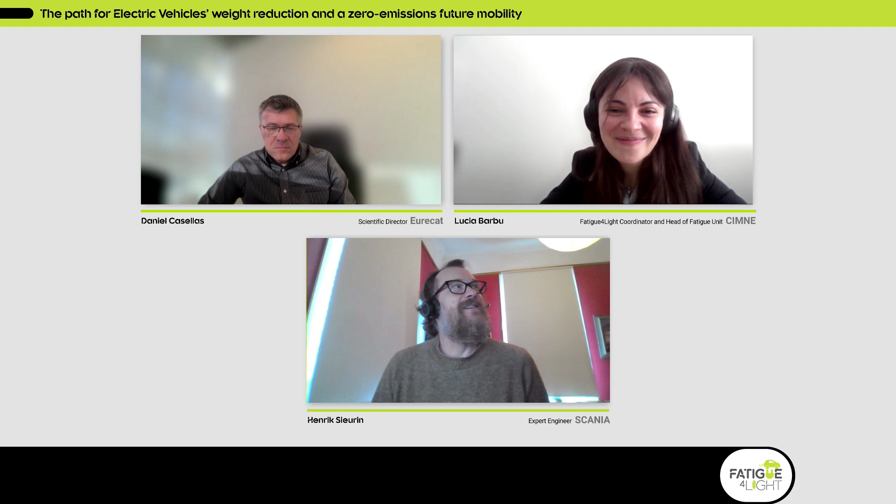And when it comes to fossil-free steels, I don't expect any big differences in the material properties, and that's also what the steel suppliers tell us, that we shall not see any big difference. I haven't really investigated these fossil-free steels in detail. They are not really available yet, but of course you could maybe expect some minor differences in impurities that might influence weldability or formability, but I don't expect to see any big difference in fatigue properties, for example. Let's hope for even better properties, but let's see. Let's go for even better properties.